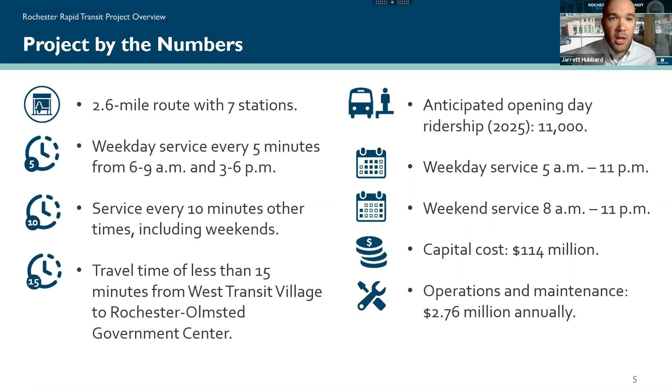We expect 11,000 riders the day we open in the spring of 2025. We're talking about having expanded service hours compared to what's typically offered by RPT, with a total project capital cost estimate over 114 million, and roughly a $2.8 million annual operating cost.

Next we'll be able to see a map, showing that route mainly along 2nd Street, starting out at the West Transit Village, currently Mayo's West parking lot by Cascade Lake Park. That will be the western end, then proceed down 2nd Street all the way until you hit the Civic Center and 3rd Avenue. Then you would take a right-hand turn on 3rd Avenue, followed by another right-hand turn onto 4th Street, then hit the Government Center, followed by another right-hand turn onto Broadway to head back west towards the Mayo campus and the West Transit Village, with a left-hand turn back onto 2nd Street.

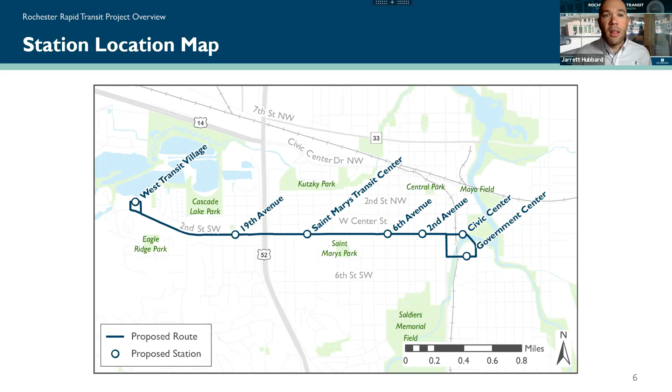So think of it as a loop on the eastern end, going around clockwise. All right, one last thing before I hand it off here, talking about the schedule.

Once again, we hope to have service open and operating for you to ride on in the spring of 2025. Working backwards, that means a large part of the construction that's needed, including the construction of the stations, will primarily be done in the year 2024.

We do expect and hope that we can start some minor work in 2023, corresponding to when we receive roughly 49% of the project cost from the Federal Transit Administration. Right now in 2021, we're going through both the environmental phase and some early design phases, including some basic station architecture that you'll see here today. We'll conclude a lot of that design next year.

With that, I will hand it off to Amarama, and they will talk through the co-design process. Amarama.

Well, hello, everyone. Thank you for coming today, and thank you for this opportunity. I've had a lot of fun, and it's been a real honor to be a part of this process.

Basically, a lot of us had applied for and juried in for this. I was especially interested in the co-design process for a number of reasons, one of which I personally live a couple blocks away from where the proposed 2nd Street, 19th Avenue station would be. I also have 3 children, so what the future has in mind is really important for myself and future generations going forward long term in terms of transportation and how that impacts the environment. So those were some of the reasons why I wanted to sign on.

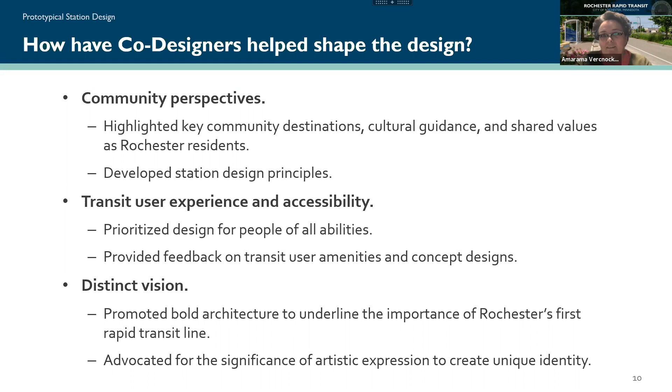Going back to the station design principles, for myself and a lot of others, we really took the time to input, and I really appreciated there was a lot of diverse options and opinions that were stated. I really feel like those who were involved tried their best and did a great job of addressing equity and accessibility for those within our communities, ease of use, various ways of using the stations, making sure they were handicap accessible, especially was really important. As well as safety mindedness, environmentalism, having various plant structures for pollinators, looking into various options. And the connectivity within the communities was really addressed early on in the beginning phase.

A lot of folks, and myself included, we were like, is this just the only section? Well, this is just the first part of the phase of the section, and it's going to be really exciting long term.

As far as safety and comfort goes, a lot of really great thought and input was put into that, as well as addressing the year-round climate that is very unique to Minnesota between the extreme cold and the extreme heat. So with those aesthetics in mind and the sustainability, we really wanted to make sure that was addressed as well.

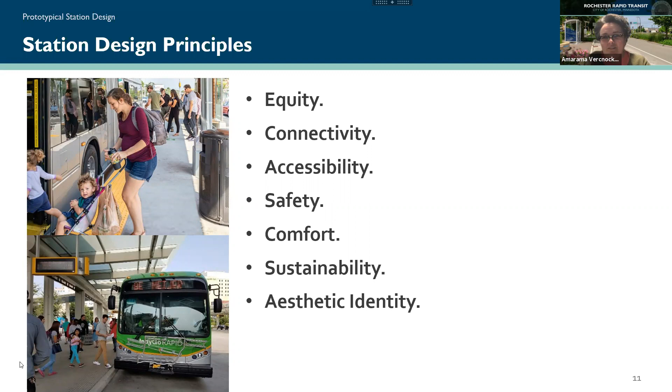As Jarrett indicated earlier, I'm one of the designers, architects working on stations, particularly focused on the 7 station areas. I'm going to talk about a lot of the architectural elements that you're going to see at the completion of this project. Part of our process was really examining the Rochester rapid transit line in the context of maybe some other BRT or rapid transit lines across the country, making sure that we are giving an amenity level which is on par or even above that. I think there's an interest as we work through the process to provide a high quality, robust kind of transit system for the city of Rochester.

So what you see on the screen are 4 that we looked at, and we looked at a lot more than what's indicated here, but to give some examples of how BRT is done across the nation is where we started.

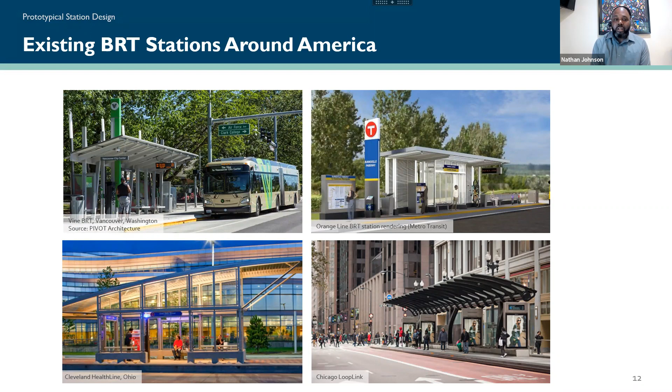So what we set up as we worked with the co-designers and the city of Rochester, the things that were really important in regards to the rapid transit line for Rochester was that we wanted an extended canopy that covers more than 80% of the platform area. There was a high desire to provide a 4-sided shelter area. A lot of bus amenities or bus shelters are 3-sided or maybe just have a windscreen, but there was a high desire to provide an environment that felt fully enclosed and available for the public to use so they could stay warm when they're waiting for the bus.

But in addition to those four-sided shelters, we also identified different types of environments that people could occupy. So we developed the concept of what we refer to as a booth, which is more of a wind screening, but it's an individual type of space you can be in instead of a sheltered area, which is four-sided and can have a lot of people in it. And there are places to wait outside as well on the platforms.

As we worked with the co-designers in the city of Rochester, providing enhanced accessibility and wayfinding was critical. The recognition that the city of Rochester is kind of the destination medical center in regards to that portion of the project, and the number of people who may have limited mobility that may want to use transit, making sure that we're providing the most robust accommodations to them that we can. So what we did is we have multiple access points. We have a very clear branding idea, what we refer to as the arrival beacon. And that's not just visual, but it's something that could be tactile, and there's going to be sound and things like that associated with it.

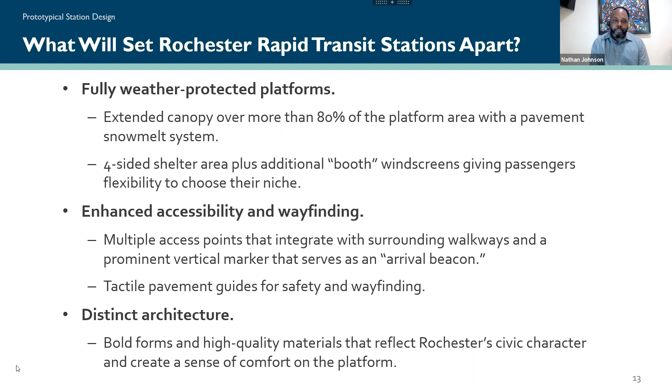So some of the final elements that you will see in the platform is the West Transit Village, 2nd Avenue, and Government Center stations. The sizing of the shelter may vary a little bit. Lots of canopy coverage was really important for us. There'll be seating and leaning rails, so different types of places to rest.

One thing that was really important is we are actually integrating two information screen panels. One faces the transit user side, for people along the platform using the transit system, but we're also adding an additional screen that faces the pedestrian side, which you'll see when we look at the plans of the actual platform. That screen can provide more community information that would be accessible and tell that story.

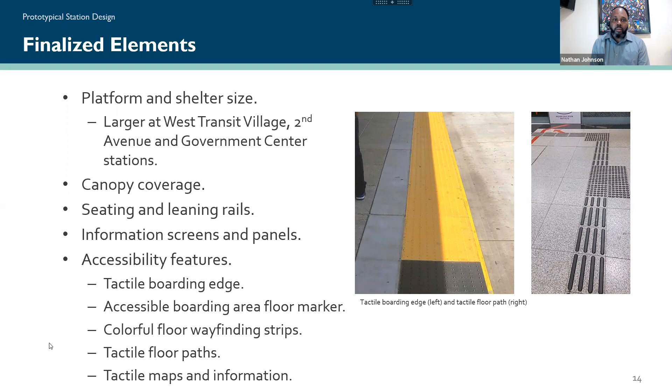With all the work we've done to date—we've been working on this about 9 or 10 months, maybe a little more—there are still things we're considering that are still to be determined. We have this concept for the booth, which is a more individual kind of waiting area. We're still working on developing that design, with particular interest in how people with limited mobility would use that space. We're still working on the materials.

We have a slide later that provides some information on the preliminary materials. Colors are also up for grabs—we're showing a fairly light gray or white color in a lot of areas, but as we continue to develop the stations, that could change. We're looking at opportunities for lighting, specifically wanting a very well illuminated station area, but also providing some dynamic lighting which can add visual interest at the station.

You'll be seeing an artist call fairly shortly, which will identify ways that public artists from the community can engage in the continued development of the platform design. Some of those opportunities can include railing panels, the station marker, windscreen panels, and maybe even platform pavement. But that will be determined as we select the artist to participate with us on this project.

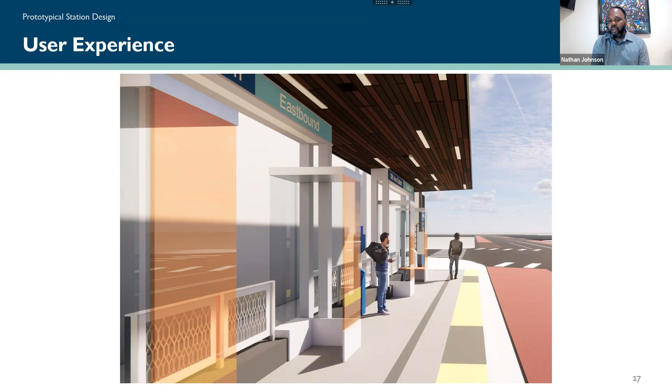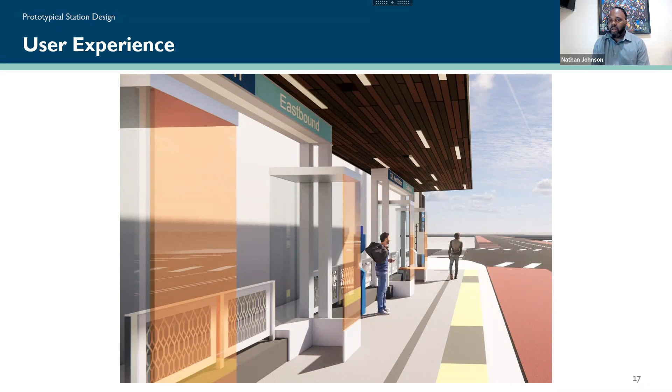I'm going to talk about the materials a bit more on a future slide. The previous slide showed the approach; this one shows what it may look like if you're sitting or standing on the platform waiting for the bus. You can see the booths in the foreground, and there's a guardrail separating pedestrian traffic from transit user traffic. We also have this interesting wood ceiling, still being developed, that will integrate lighting into it.

The way the rapid transit line is structured, you prepay before you get on it to speed up boarding and the flow of the actual bus.

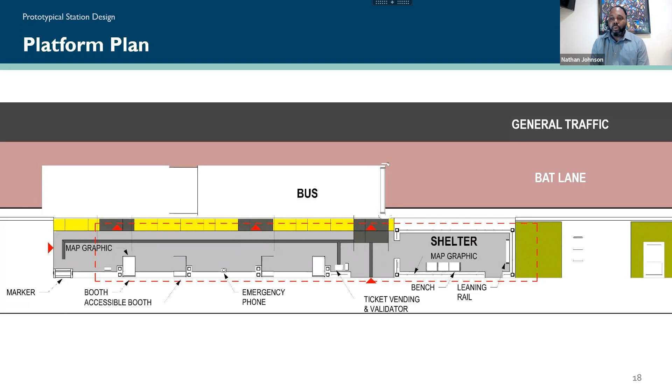Some key amenities include landscaping integrated around the shelter areas. Each site will be adapted according to its location, but you can see some green patches, at least in the prototype, to the right of the station.

There's a lot of concrete. We're going to vary the color of the concrete between the platform and the curb along the back edge. Other things you'll see are tactile paths and warning strips, and door warning mats as well, which I mentioned earlier.

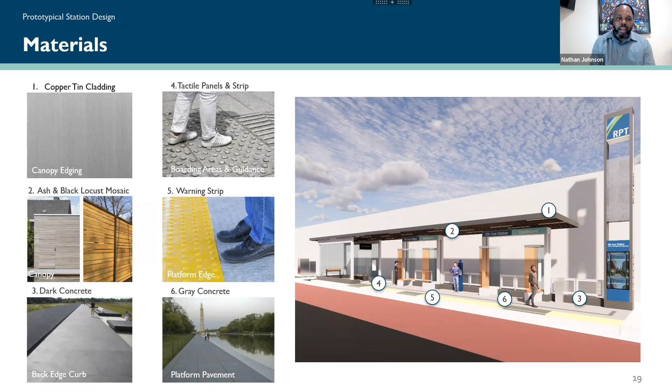The last thing I'll mention is the edging. One of our goals is to create a high quality station using high quality materials—that's the idea with the wood. We're also looking at the edging of the canopy to be a copper tin, which has a more natural finish than typical metal flashing on buildings. We know from walking through and experiencing Rochester that there are really beautiful high quality materials used on buildings, and we want that reflected in the stations and the station concept.

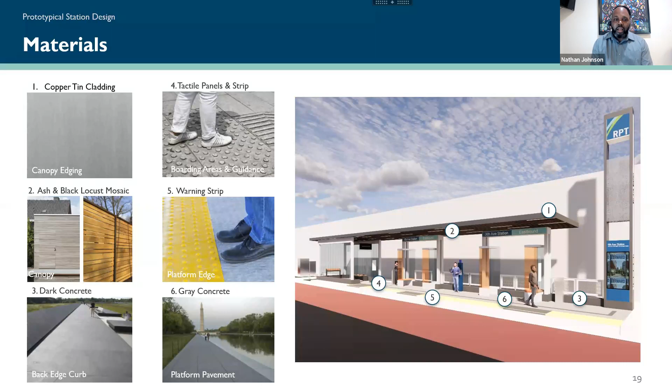Before we go into the adaptation at each station area, I know there have been a couple of questions available.

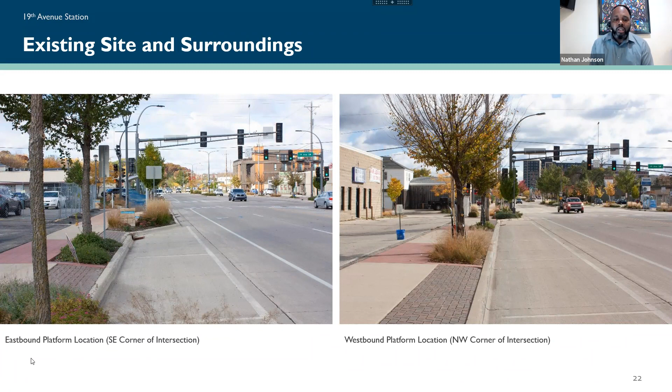So starting on the western end of the transit line, we're going to look at 19th Avenue. You can see the existing conditions at both the eastbound and westbound locations. There's an existing bus stop at the eastbound station that will be taken over by the BRT platform. You can go to the next slide.

One of the unique things at 19th Avenue, which is substantively different than any other station, is there's the bike corridor that supports this area. So we have to accommodate that bike corridor and how the stations work. In this concept, we take the prototype and place it kind of in an island with the bike corridor running behind the station so that it doesn't conflict with the bus.

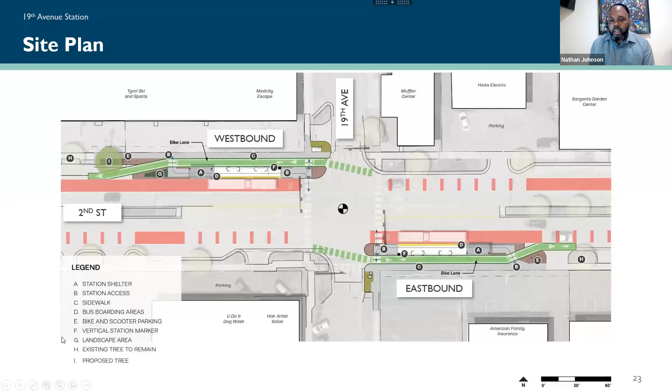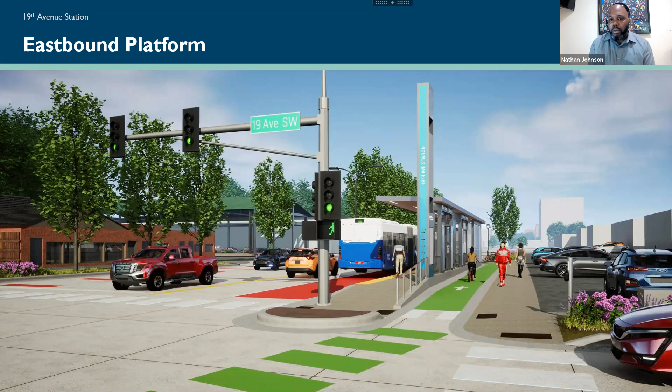This shows what that will look like in regards to our station as it sits in that kind of island on the other side of the bike corridor. You can see that the marker is a really strong, iconic piece that grabs that condition. The idea with the marker is that it's an object that can be seen on all four sides, since people may be approaching from different directions. In this space at 19th Avenue, you have a transit space, a bike space, and a pedestrian space. It's all accommodated and very functional.

At the St. Mary's Transit Center, I'll start with the transit center side. There's a station that is eastbound on the hospital side, and there's a station that is westbound, kind of where the commercial buildings are, and it's going to take over the site of Cafe Presto. In addition to having a station or platform there to load the bus, there's also going to be a transit center integrated at this location with a tunnel and an elevator, which allows you to cross over to St. Mary's Hospital.

From a plan standpoint, you can see the organization of the plan and the site. St. Mary's Hospital is on the bottom of the page, and the commercial businesses are on the top of the page, which is north. There's a platform and a local stop going eastbound that you can see on the bottom of the street, 2nd Street. On the top, on the north portion of 2nd Street, you can see where the St. Mary's Transit Center will have a large canopy which comes out and covers the platform. There will also be accommodations for a local stop at this location to the west.

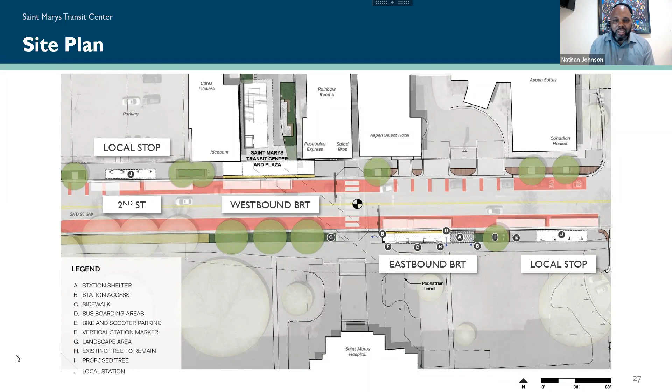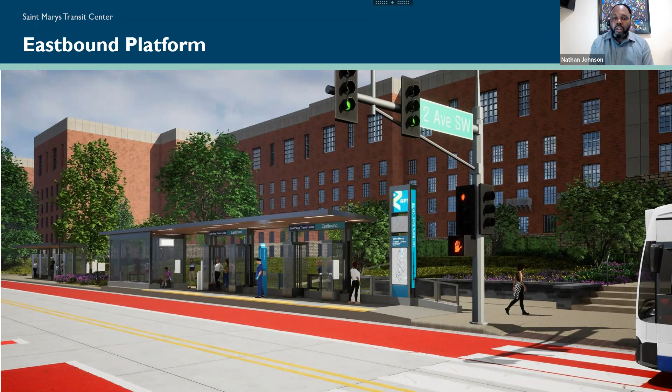This shows a concept for how the station prototype will adapt into the eastbound station, very much in line with the stations we looked at in other locations. The one thing that's different here, and this will happen at historic locations, is that the marker, which is about 25 feet tall in the majority of locations, is shrunk here because of the historic property behind it, which is St. Mary's. But it's still something that will be a beacon, something iconic that can draw people to the station site. It's a wayfinding device, and it will still integrate digital screens that allow people to get information both from a transit experience and a pedestrian experience at this station location.

This shows the eastbound platform further along, further east. You can see the BRT a bit further in the image, and the foreground shows some initial concepts for what a local stop could look like, with some similar look to the BRT concept, but different in regards to how it works.

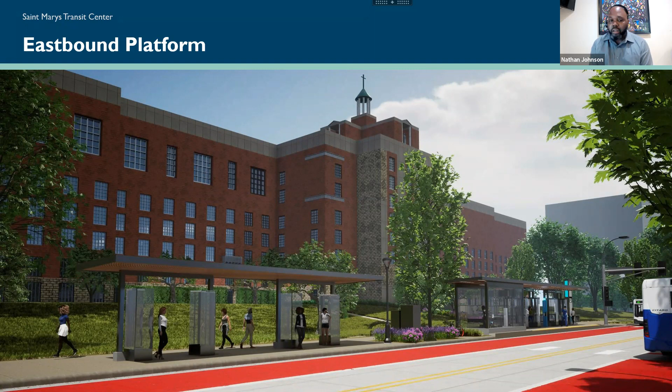This is a plan of that. So you can see where the entry is to the transit center.

It's not a very large facility, but the intent is primarily for commuters to be able to get on and off the bus fairly quickly, with the recognition that bus service is fairly frequent at this location. But in addition to creating this small pavilion type of building, it creates a great public amenity for the city at this location, a place of respite or enjoyment that you can have whether you're a business or someone using St. Mary's Hospital.

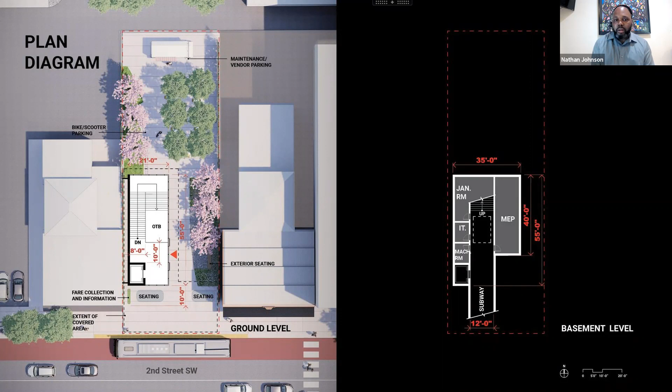Go to the next one. So this shows some interior images. I think there's an opportunity - this is a really beautiful space. You can see, even though it's not very large, it's very glassy, with some high quality materials integrated in. And this even hints at the fact that you have this outdoor plaza garden space, but we can bring some of the greenery inside this building as well.

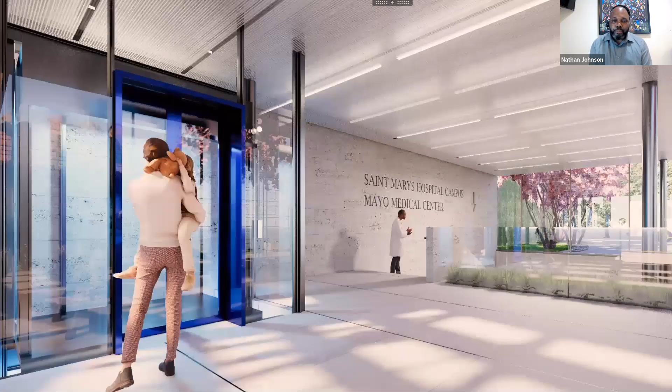You can go to the next slide. And this is another interior image a little further away that shows how this architecture is developing. You can go ahead, that's fine, go to the next one.

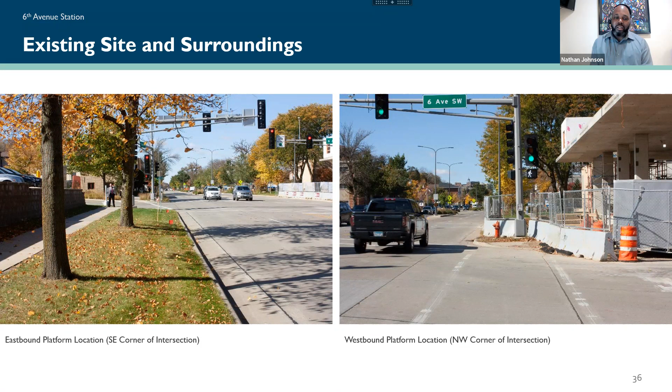But to imagine how that station would integrate there, I think our rendering is actually of the eastbound platform, because that building, at least when we started the design, wasn't quite as far along in construction as it is now. You can go ahead to the next slide, Lisa.

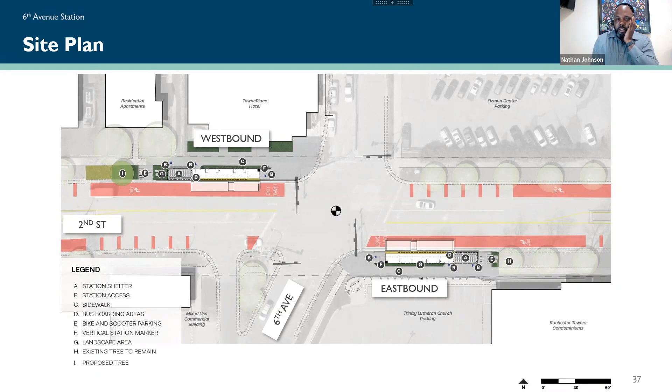You can go along to the next one. So 2nd Avenue Station, close to the Mayo campus. One is in front of the Mayo building and one is in front of the Hilton building. So let me get my directions right - eastbound is in front of the Hilton building, and then westbound platform is in front of the Mayo building. What that will require is one of those custom shelters that you all had done a few years ago will have to be relocated to a different location to accommodate the BRT concept.

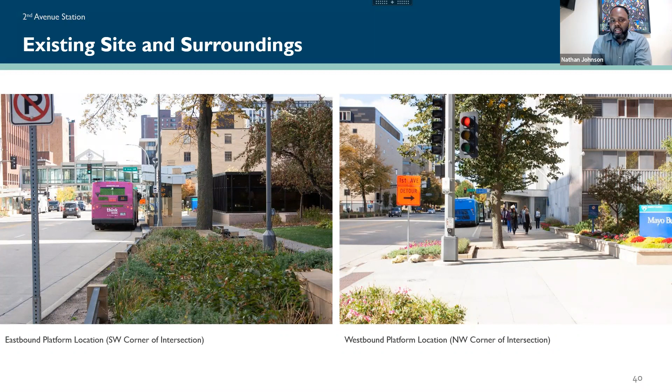At the Mayo station, we increased the depth of it to 13 feet. We were very conscious about still creating a great public pedestrian way behind the station, because there's a lot of foot traffic here, but also getting a platform which is robust in recognition that a lot of people are going to be waiting here. So you'll see larger shelter areas at this platform than what we've seen at the prototype.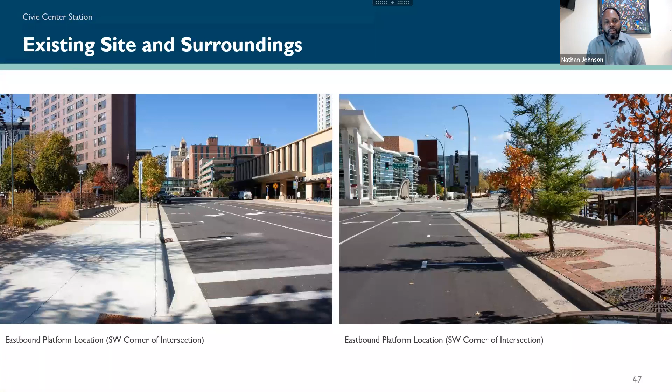This is one of those locations where, at the majority of stations, we have platforms going both east and west. At the next two stations, Civic Center and Government Center, the platforms only go one direction because the transit line moves in a loop. It will go east, then start turning and go south, and loop back around onto Broadway and back onto 2nd Street. So this is one of those single platform locations. This platform will be an extension of that beautiful public space that already connects down to the river.

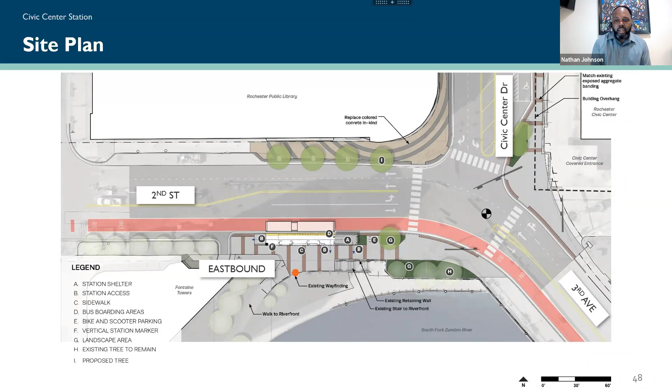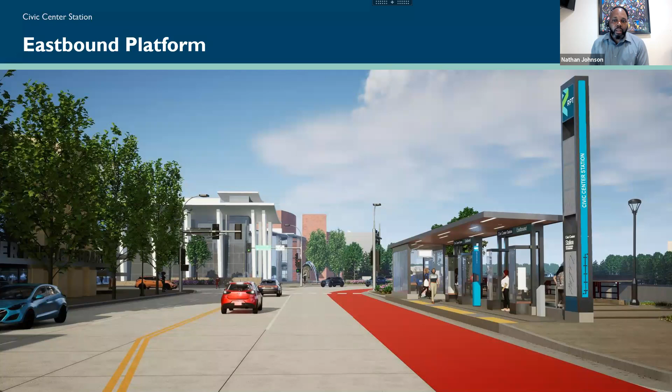This shows the concept for how this integrates in. We would have a tall marker at this location to really create this iconic piece of the station, identify it, and show how it sits within this environment with the booths, and the shelter area on the far side of the platform.

The last station we're going to discuss is the Government Center station, located on the south side of the Government Center. You can see what that environment looks like. Just like at Civic Center, this station only goes one direction because it's part of the loop.

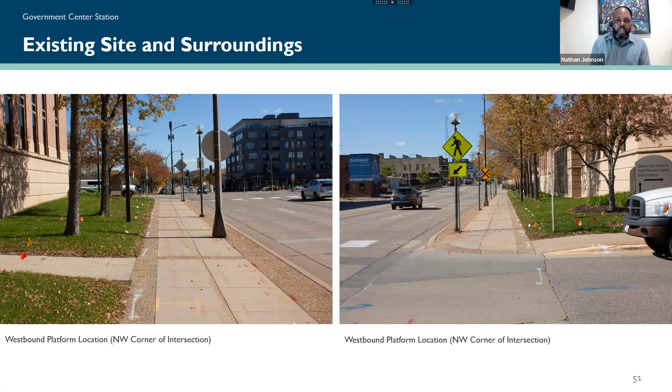One of the things here is they're going to create a median in the middle of the street to create a more pedestrian friendly environment. The station sits on the north side of the street, 4th Street in this instance. This is the more traditional prototypical station type, where you can see the access points at the end where it says 'B' there, and another access point along the sidewalk in the middle.

We can go ahead to the next one. This shows how this sits within that station concept. You can see the Government Center behind, and the prototypical station fitting nicely into this environment, with that full shelter concept on one end, the booths in the middle, and these different types of spaces in between that people can wait for the bus.

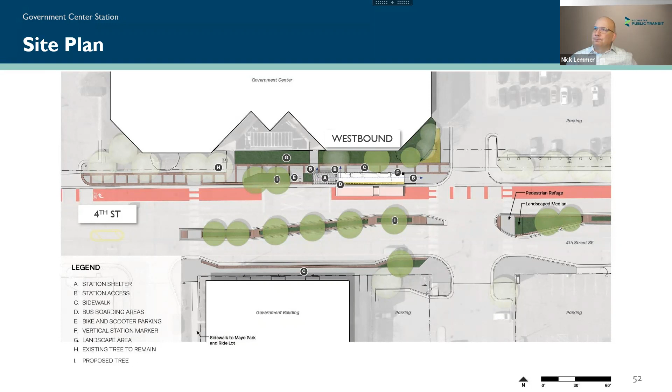We appreciate that. Say, Jared - if you wanted to address that one question answered in the chat, I believe Jamie asked if all of 2nd Street is moving from 4 lanes to 2 lanes. I think that's a common question, so maybe you want to take that one. Let me first introduce Nick Lemmer, Communications Director for Rochester Public Transit, who has also been joining us on the call, trying to answer several of these questions.

The question coming in is about the number of lanes in the corridor. Right now, for most of the corridor, it is 4 general purpose lanes, 2 in each direction. The plan is to utilize the outside lane for what's known as a business access transit lane, or transit preferred lane, so transit would hopefully be the preference. I say preference on purpose because the public will still use those outside lanes to make right-hand turns into side streets, businesses, and other accesses. So yes, with those transit preferred lanes, we'll be going from 4 to 2 general purpose lanes in most of the corridor.

The one exception to that, which was part of our traffic webinar - so check our website for that - is between US 52 and 14th Avenue. Our traffic modeling for the entire project, particularly around 2nd Street downtown, shows that traffic in that area at peak times will not be handled with 1 lane. So there will be no transit preferred lanes between 14th Avenue and US Highway 52.